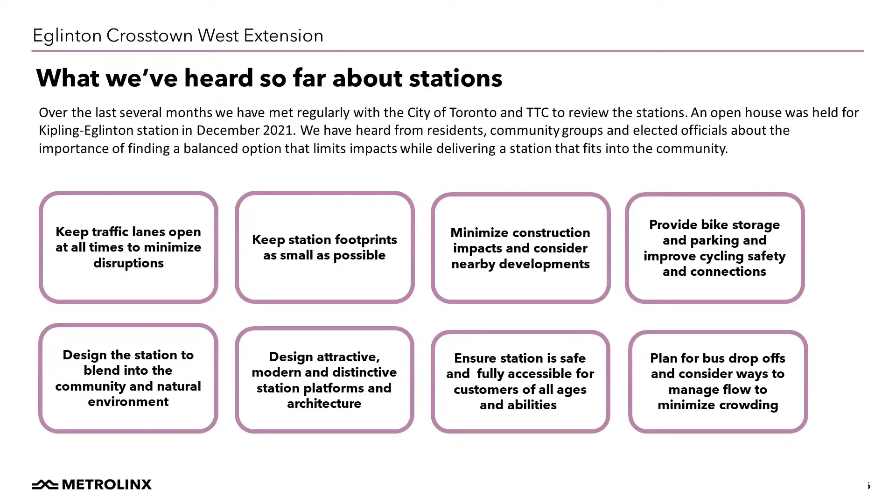It worked this time, fantastic. So these are a number of the key considerations during preliminary design, and we've talked to these in the past. Just quickly: private property, limiting impacts to homes and businesses; the community, considering how the station serves as a hub in the community and connects to nearby developments; transit and traffic, in terms of construction, limiting road occupancy and road impacts, and ensuring good connections in terms of travel time and connectivity. From an environmental perspective, we know Eglinton has many trees, it's a very well-treed area, so we're considering the canopy and the impacts, as well as station energy efficiency and the overall environmental performance of the station.

And then, of course, constructability and deliverability of these underground stations are complex construction projects. This is one of the features, as we've highlighted in the past, where for 3 of the 4 underground stations, we've been able to put the station box outside of the Eglinton right-of-way, which allows the construction largely to happen not in the roadway.

So with that, I'm going to pass this on to Omid to take us through a bit more about the station design principles and to walk us through preliminary designs for each of the 4 underground stations. Over to you, Omid. Thank you, Josh, and good evening all. Thank you for coming along for this session.

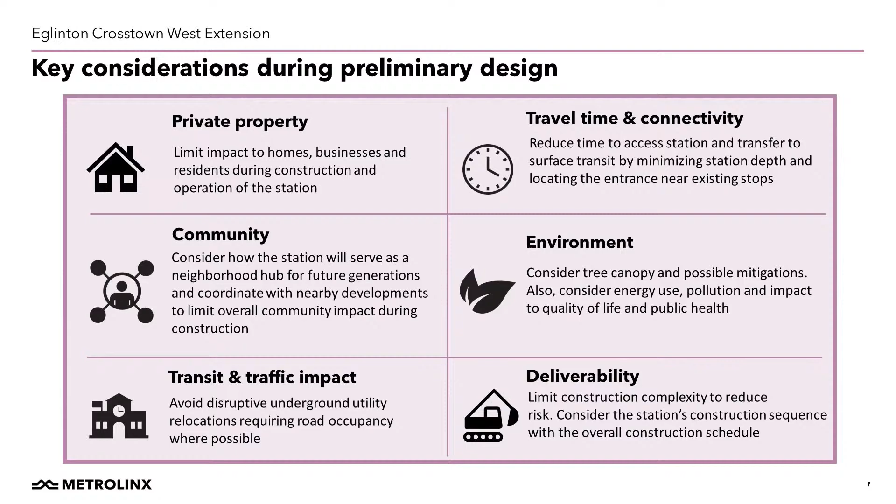Next slide, please. So just building on what Josh already mentioned about some of the feedback we got from our previous sessions, the station's design principles are mainly built around the idea of benefiting the context that we are locating, and also the neighborhood and community that we are locating the stations. So there are 4 principles there that we are working very fiercely to make sure we are abiding to.

One of them is create safe and efficient passenger connection to the stations. It's very important for us to make sure that passengers and their safety are well taken care of, including the pedestrians and folks using the buses. So 80% of our passengers are going to use the north-south buses, and the connection between the bus stops and the stations is very key for us in the design of the stations.

The next principle that we are really pushing forward with is to improve the passenger journey from outside the station all the way to the train. In order to do that, we are applying a user-centered design for the whole line. We are bringing natural light to the station platforms, something which is quite new in Eglinton, because of the way the station boxes are located off corridor outside the road. We had the opportunity to bring natural light down all the way to concourse and platform. We're using a way of station design to make sure that wayfinding is very intuitive and natural. And we are also making sure the stations are very safe and accessible for all members of communities.

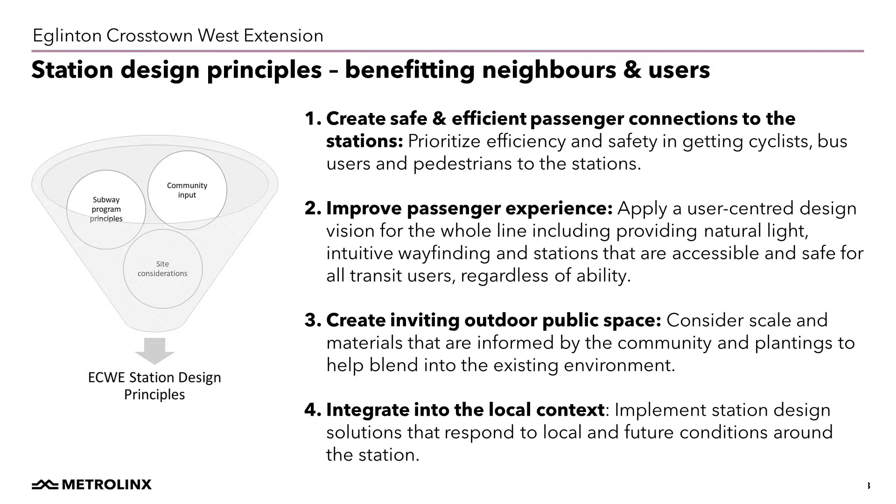Next slide, please. In this slide, I'm just trying to explain to you how some of those principles are translated in the way we are designing the station. Later, I'm going to show you some of the images and site plans of those stations.

So, in order to create a safe and efficient passenger connection to the station, we start our action from the curb basically. We start by having curb cuts to improve pedestrian safety on the curb. Then we have bus stops as close as possible to the entrance of the station, and where it's possible, we are introducing bus laybys. We are introducing bike racks around the station entrances, and we are locating the ancillary and emergency building in the right place to make sure it is creating a safe environment.

In order to improve the passenger experience and make sure we have enhanced the quality of a user journey through the stations, we introduce at least 2 elevators at the entrance, which provides redundancy for elevators, meaning passengers with impaired mobility can use the elevators from the ground all the way to platforms at any point in time. The elevators are through elevators, which means, again, passengers on wheelchairs don't need to turn around or rotate in their journey.

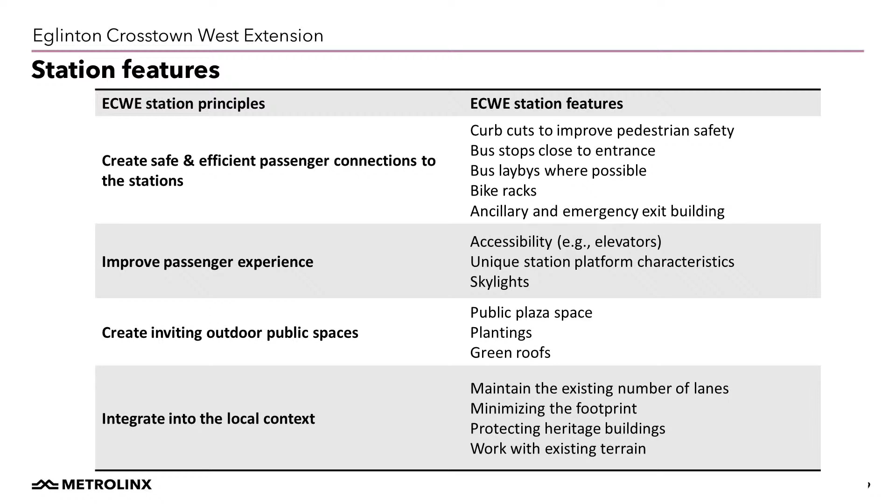We are protecting heritage buildings, especially in the case of Royal York Station, where we have Mary Read House, a heritage building, and I'll show you some of the design ideas we've deployed there. We are also working quite a lot with the existing terrain around the stations to make sure we're not disrupting the urban morphology, and trying to blend with the local context as much as possible. Next slide, please.

This slide clearly summarizes the passenger journey from the ground all the way to the platform, and some of the ideas we've deployed to enhance the quality of that journey. Starting from the right, passengers come to the entrance very quickly from the bus stop, which is very close to the station entrance — I'll show you on the site plan later — and they have a very linear passenger journey all the way down to the platform.

After passing through the gates, going from the unpaid area to the paid area, starting from the right and moving left, you see two fully glazed elevators in front of them. These are through elevators, meaning passengers can take them straight down to the platform without stopping anywhere. They can also take escalators or stairs down through this open volume, where as they descend toward the concourse they see the surrounding environment through the glazing of the entrance. We also have skylights right on top of the vertical circulation — the escalators and stairs — bringing light all the way down to the platform.

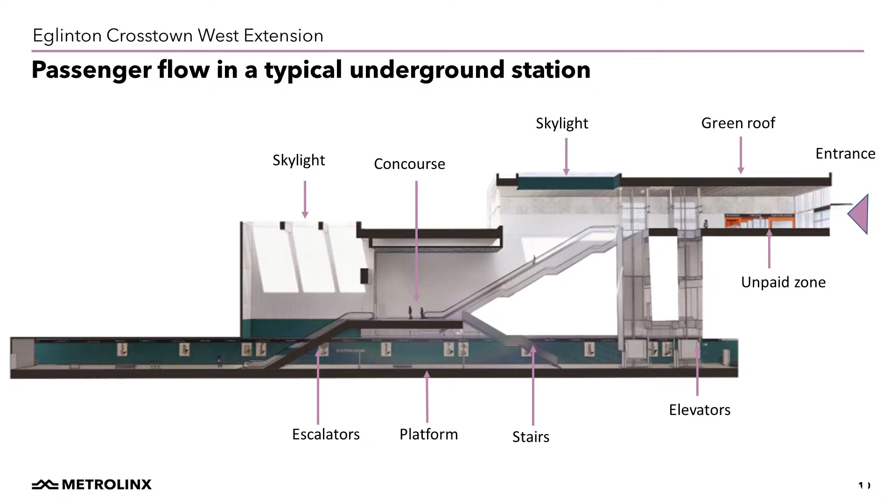Once you reach the platform, we indicatively showed a color identifying that specific station, just to convey that we're using color on platforms to identify each station's location. This slide summarizes exactly how a passenger goes from the bus stop all the way down to the platform, and vice versa. Next slide, please.

So in the next few slides, I'm going to take you through each site plan, starting from west to east. The first station we're going to talk about is Martin Grove.

Martin Grove is sitting on the northeast intersection of Martin Grove and Eglinton Avenue. This is the only station where the station entrance and ancillary building are sitting on the northeast side. All the rest of the underground stations are sitting on the northwest side of the intersection.

In this station, the station entrance is located very closely to the corner of the intersection on the northeast side, and we have the bus stops very close to the station entrance, located on the northeast of the intersection, along with the station building.

You can relate it to the previous section you saw, with the station building with the skylight on top of it, taking the passengers down through that station entrance.

The station entrance is located on the station box, shown here with that dashed blue line below. You can see the station footprint is actually quite minimized. Folks from West End Connectors will later talk about the head walls, but we have tried to respect those head walls while also building the station footprint as efficiently as possible.

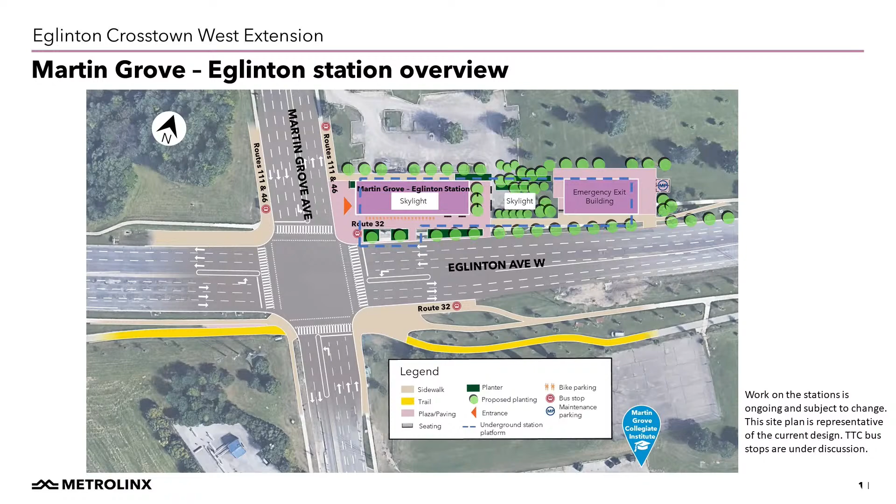Next slide, please. I forgot to mention that these are work in progress and might change as the project gets procured, but I think the intention remains the same.

In terms of Kipling Station, last time we came for public feedback we presented three options. One option was a northwest option, where the station entrance and ancillary building were located in the woodlot, minimized as much as possible, but at the time it was shown slightly in the woodlot.

We also had the southwest option and the hybrid option. The hybrid option had the least impact on the woodlot. We explained that we were not entertaining the southwest option for several reasons, including buildability and deliverability, and discussed the ideas between the northwest and hybrid options.

We got feedback from the community that the hybrid option was more preferred, as the idea was to protect as much of the woodlot as possible, though 45% also suggested the northwest option.

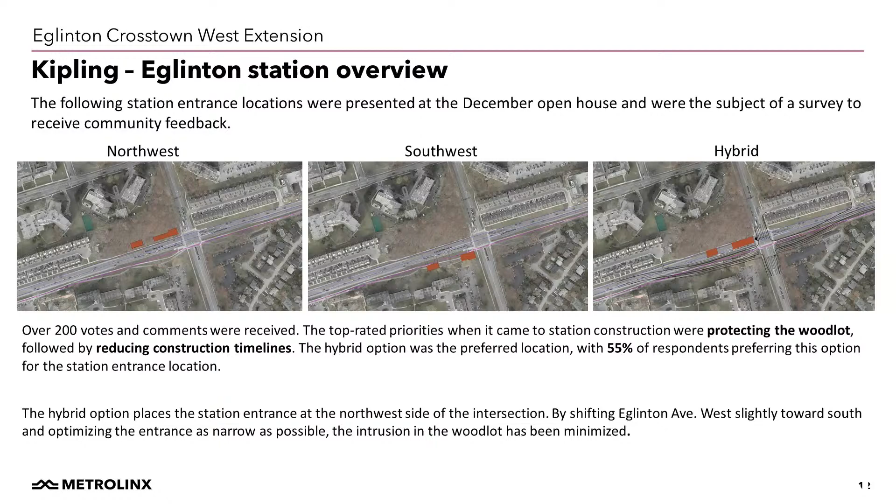So what we came up with is a kind of hybrid between the hybrid option and the northwest option, where we tried to minimize the station entrance and ancillary building as much as possible, while only moving Eglinton Avenue toward the south and realigning it just 3 meters. This also protects the MUP and trail to the south as it is, and helps reduce the number of impacted trees on the northwest corner. This option has the station entrance minimized quite a lot compared to the past.

Compared to the past, we have created a kind of slot to get the passengers to a concourse level in this station, and then from there guide them through to the platform.

In terms of the way it's going to interact with the intersection, the bus station is very close to the station entrance. Passengers getting off the north-south bus coming down, next to the station entrance, just walk a few meters to get there, and from there go very linearly all the way down to the platform without any bends and turns. The passenger journey is very straightforward.

The toolkit that we devised here is very similar to what you already saw in Martin Grove, and the idea is trying to abide by our design principles as much as possible. So we have a line of trees working as a boundary between the station entrance and ancillary building and Eglinton Avenue.

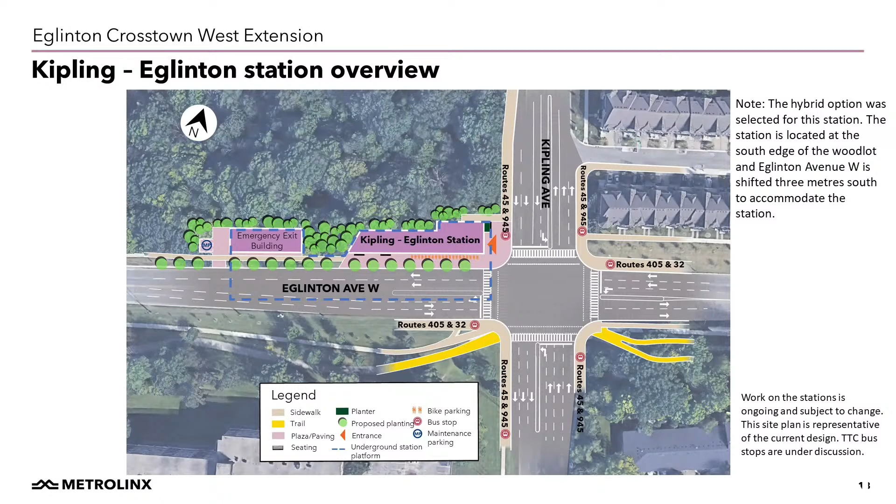We have the bike parks on the south side of the station entrance, providing enough bike racks for passengers to use. We have a public plaza in front of the station entrance, and sidewalks coming from the north connected to this plaza. We have also minimized the impact to the woodlot here. Next station, please.

Next station that we have here is Islington. Islington is an interesting station because as you come from north toward Eglinton, you have a significant gradient change from the road with the north sign there, all the way down to Eglinton. The level difference is almost around 5 to 6 meters.

So what we have tried to do here is work with this terrain and tuck basically the station entrance into this existing green area, and by also introducing a green roof, we have reblended the station entrance and ancillary building with the surrounding greenery, which we think has been successful.

We also have the bike racks, and the trees on the south again to be a boundary between the station entrance and the sidewalk and Eglinton Avenue. We have the station bus stop very close to the station entrance, and the journey from bus stop to station entrance is very close - less than 10 to 15 meters - and then from there you get down to the platform, very straightforward.

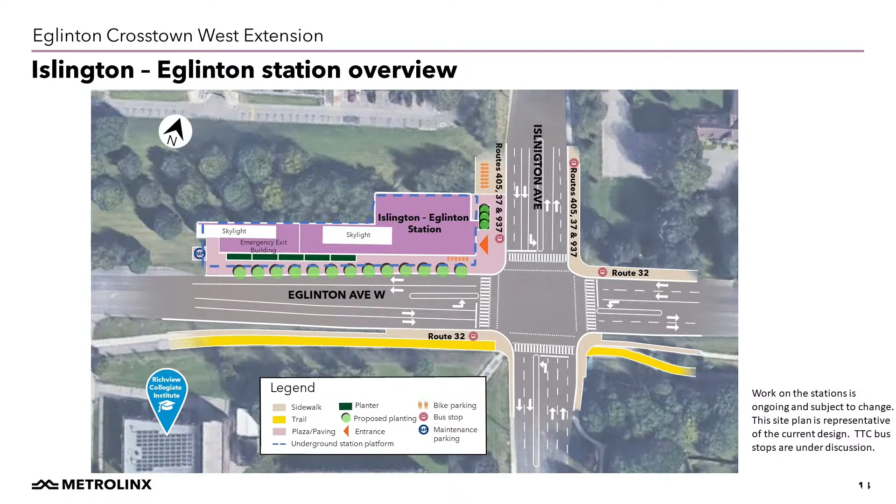So just before I explain the last station, which is Royal York, you probably noticed that one of the approaches we have done here around the station design and the plaza around the intersection is to try to create a sense of place and a meeting point on the intersection, using this opportunity as a place-making exercise, even though it's quite surgical, intentional, and minimized by deliberation. However, we have created a modern and efficient language around the station design that passengers can relate to.

There are a few things that maybe you have to notice here, in addition to the trees working as a boundary between the station sidewalks, entrances, and Eglinton Avenue. One is that the Mary Reid House and the angles from the station entrance and ancillary building are almost 45 degrees toward Mary Reid House, trying to respect the view toward Mary Reid House from the passengers or users using the streets or sidewalks on the other side, and also the sidewalk around the station.

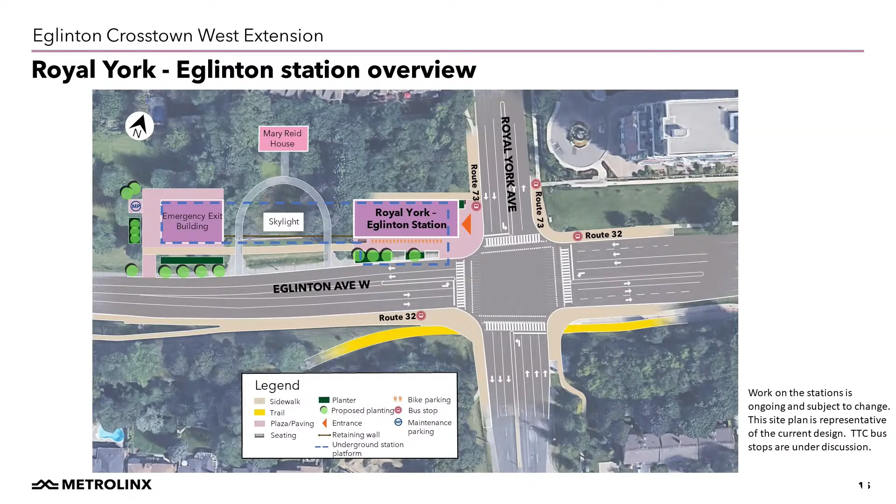Going back to our principles, we've tried to consolidate the emergency exit building and ancillary buildings into one building away from the main entrance, minimizing the overall footprint of the station. The blue dashed line shows how the station footprint has been consolidated as much as possible.

That takes me to the end of my part of the presentation. Now I'll give it back to Josh to take you through the next slide. Thank you, Josh. Thanks, Omid, that was great—get a drink of water. Really appreciate that.

So this was our review of the preliminary design of the four underground stations. As mentioned, we'll be bringing forward a similar level of content for the elevated stations at Scarlett and Jane, as well as Renforth Station, in future engagements.

For now, we have the link up here. After this meeting, we'd love for you to go on and provide feedback on key design principles as well as key station features you'd like to see at each of the underground stations. We got great responses—over 200—to our Kipling survey, so we're looking forward to good feedback on this next round.

This gives you more links, and as we've said before, we're happy to set up smaller meetings with community groups. If there are community groups around any of these stations who'd like a more in-depth conversation about the station in their area, or several of those stations, you can reach out to us and we'd be happy to set those up.

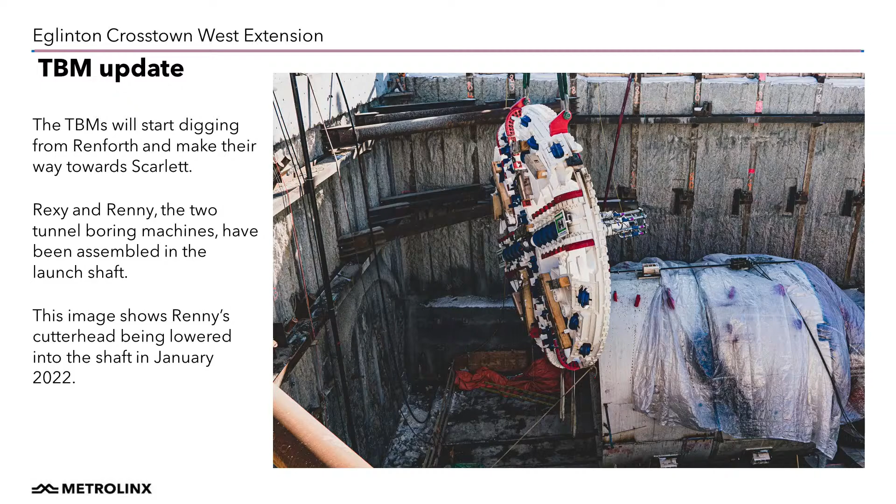The first one, Renny, which you'll see in the next slide, is progressing really well. It will be the first one launched. In this next slide, you can see the situation of the assembly of the TBMs in February 2022.

Not only were the shields of the two TBMs assembled, but at that point the trailing gear of the first TBM was also placed. You can see here a pretty spectacular photo of the bridge.

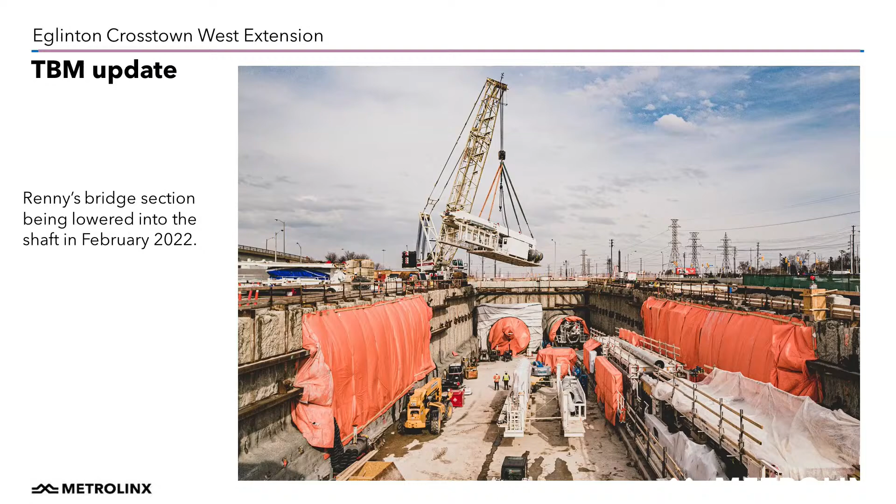Note that this is the piece that basically is the connection between the shields and the trailing gear, and was lowered into the shaft.

Here you can see a picture of the layout, the whole launch shaft with the TBM pre-assembly and the rest of the elements we will need for the construction of the tunnel. With the tower crane, we will lower the pieces that will create the final lining of the tunnel, the grout that we will inject in the extrados of the tunnel, and the rest of the elements to support the excavation.

At this point, we are testing and commissioning the first of the TBMs. We expect to start tunneling the second or third week of April. At that point, overnight work and extra hauling in the Renforth area is expected. In any case, a notice with more information will be shared in advance of the work starting, and that notification is actually starting to happen now.

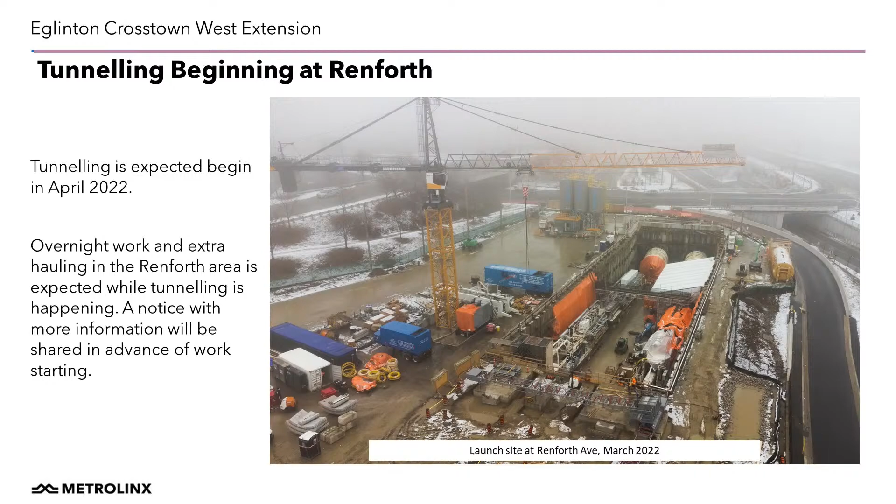Another update we want to share with you is about the oncoming construction, in this case about the extraction shaft. Because of some issues with permitting, we have to adjust our construction a little bit, with the intention to mitigate some minor delays we had and try to deliver the project on time. That is our commitment.

So over the next few months, WECC will shift the Eglinton Avenue West lane approximately 10 meters south between Scarlett Road and the pedestrian bridge. This work is necessary to prepare for the extraction shaft work, and will follow the realignment of Eglinton Avenue. This realignment will be in the final configuration, so it will not need to be realigned again.

The 3 bus stops will be temporarily relocated, so they will remain in service but in a different location. Crews will close the north westbound lane for 1 week to build a temporary bus platform.

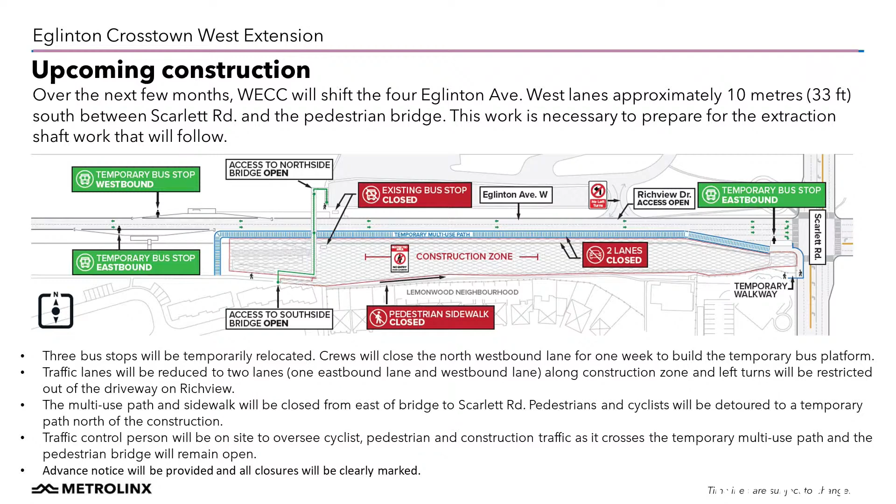The next work we will start is about the Headwall. A question we often receive is, what is a Headwall? The Headwall is an underground support wall located at the east and west ends of the station location.

These are 2 of the 4 walls of the temporary support of the excavation, necessary to permit the excavation first and then the construction of the station. The TBMs bore through the Headwalls, so this Headwall needs to be constructed beforehand. That is the technical reason: to prevent entrance of material and ensure the Headwalls are sealed against the tunnel, which needs to be done before the tunnel goes through. That is the technical reason that recommends constructing the Headwalls at this stage of the Eglinton Crosstown West station.

There will be 4 underground stations: Martin Grove, Kipling, Islington, and Royal York. So we need to construct 8 Headwalls for these 4 stations. As well, in this section of the Eglinton Crosstown West station, we have 2 emergency exits, and we have to do a very similar thing, constructing Headwalls, 2 for each emergency exit, so in total 4 Headwalls for these 2 emergency exits. One will be between Kipling Avenue and Islington Avenue, and the second between Islington Avenue and Royal York Road.

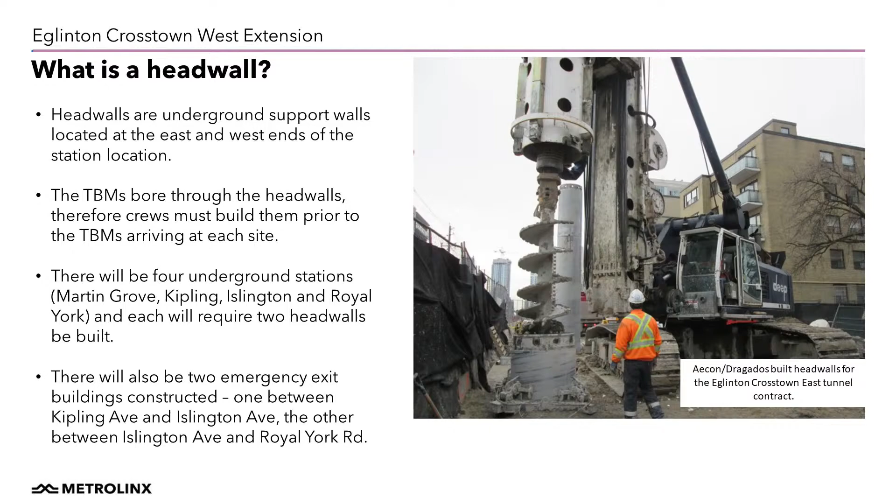At this point, I'm going to hand over to Stephanie Cho, our communication lead, who is going to present the next slides.

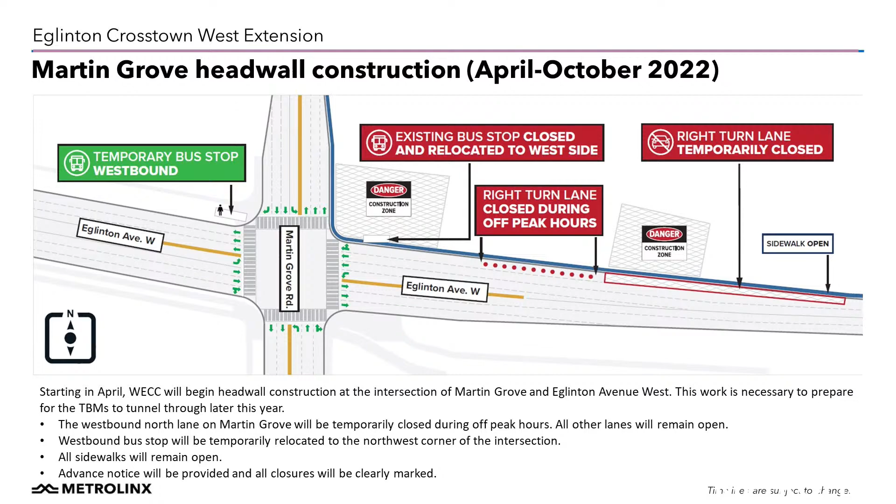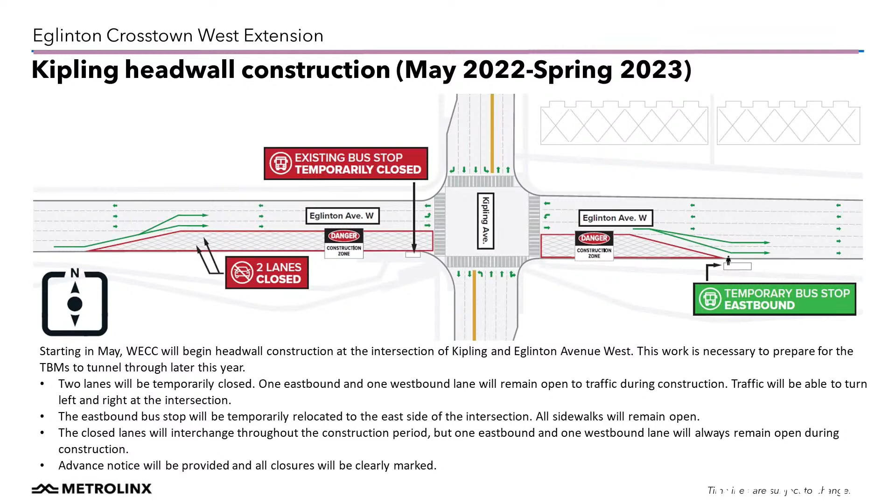Go to the next slide, please.

So during this headwall work, we expect the impact to residents to be very minor. You can expect noise from equipment and drills and trucks that happen during the headwall work. We have mitigations in place to reduce the dust, such as water sprays and biodegradable dust suppressants. We do have noise and vibration monitors installed on properties around the construction area, residences, offices, and commercial buildings, and just in the vicinity of the construction. This equipment is put there to help measure and minimize the noise and vibration impacts throughout the project term, and we also do it to prioritize the community's safety and well-being.